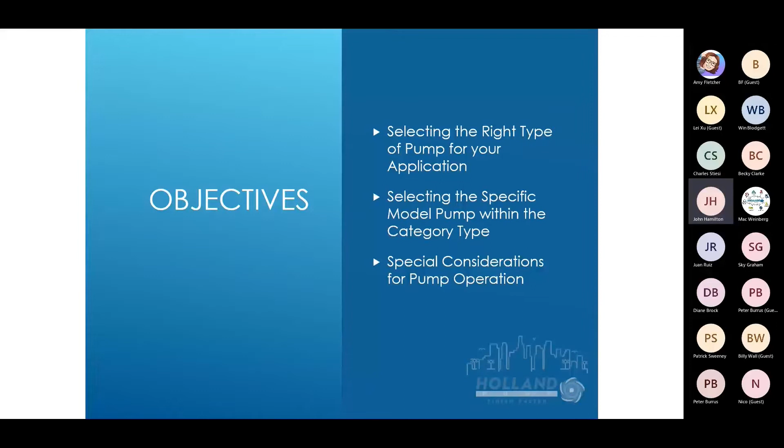Centrifugal pumps produce head and flow by increasing the velocity of the liquid with the help of a rotating vane impeller. Positive displacement pumps operate by alternating or filling a cavity and then displacing a given volume of liquid.

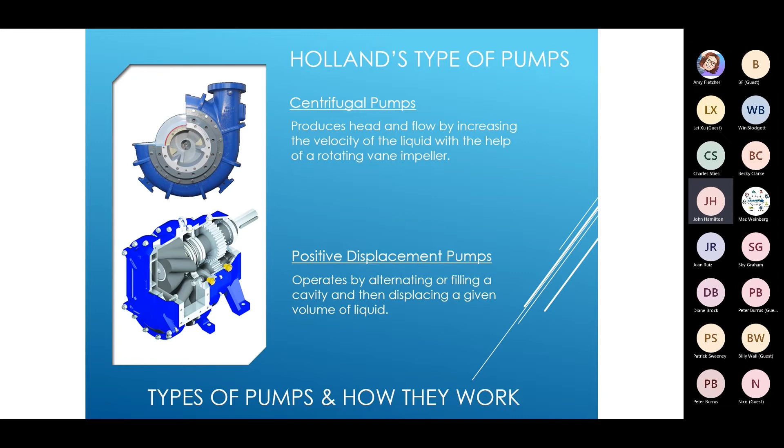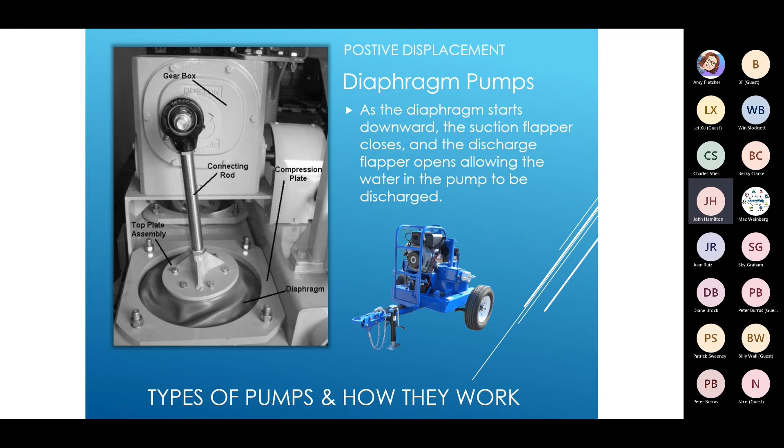Diaphragm pumps are an example of what are known as positive displacement pumps. The way they work, as the diaphragm starts downward, the suction flapper closes and the discharge flapper opens, allowing the water in the pump to be discharged.

Diaphragm pumps' advantages are they're dry priming, they can run dry, handle air and water, handle most solids, handle abrasives, and have no rotating parts in contact with the fluid.

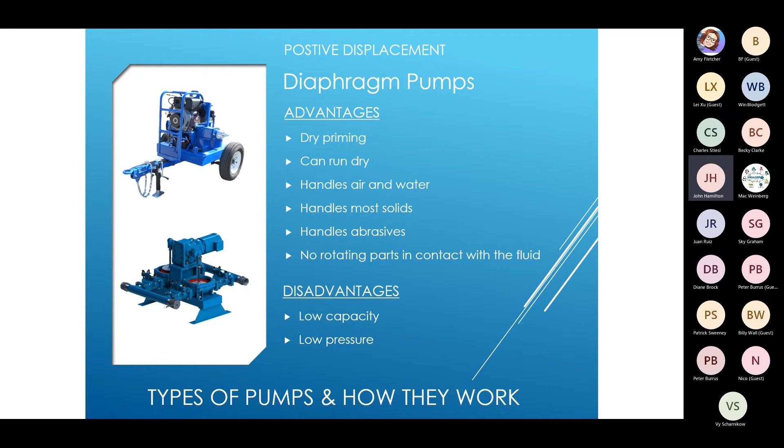The disadvantages are low capacity, low pressure. At Holland, we have two sizes available in 4 and 6-inch skid and/or trailers.

Pictured here is a well point pump on the top left, and then a cutaway of the pump itself. The general arrangement of the pump is a diesel engine, or it can be an electric motor with a gear reducer, and then the pump.

The fuel tank is sized to run the pump 60 hours continuously without the need for refueling. Below the control panel, you see a little canister with a white lid. That's for an extra fuel filter, which comes in handy.

The pump has shutdown protection. Many of the pumps are fitted with our HANS system, or Holland Automatic Notification System. It's a pump that cannot run dry for very long, so we have a shutdown system.

In rotary pumps, a low pressure area is created when rotors separate. The liquid is forced by atmospheric pressure and is carried around the housing as the lobes rotate. One lobe does not mesh with and drive the other; this is accomplished by using an external gear set.

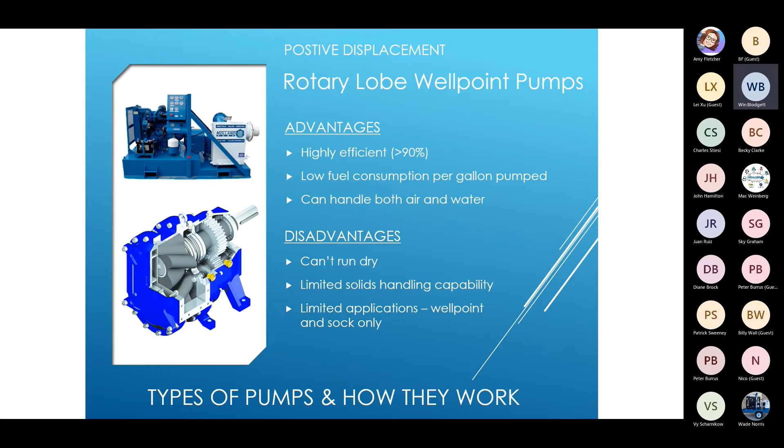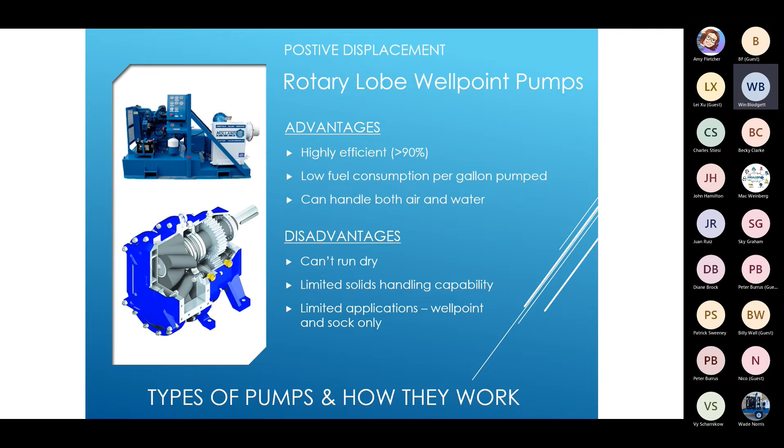However, manufacturers of these pumps typically use them in many applications, pumping thick material like drilling mud or glues and so on. But for us, the primary application is well pointing and sock.

Here you can see various types of centrifugal pumps. In the Holland pump fleet, we have electric submersibles, hydraulic driven pumps, and prime assisted pumps.

We also offer wet prime pumps. A wet prime pump requires the user to manually prime the pump with water before starting the pump.

Prime assisted pumps have several different methods. We use a diaphragm style. We also have Masport, and there is a compressor prime also. The ability to prime a pump is measured in CFMs, or cubic feet per minute.

Our trademark prime assisted suction lift pump is Prime 3. That's because our prime is 3 times faster than many of the pumps on the market because we use a 50 CFM diaphragm priming system.

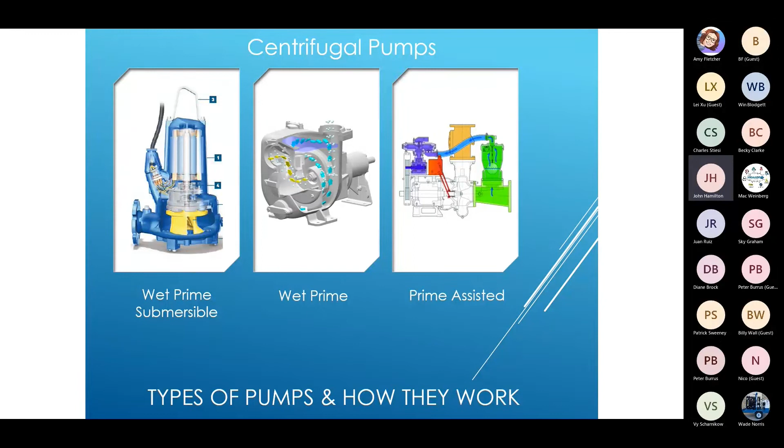Holland Pump also offers a Masport style vacuum assisted pump that has much higher CFM capability. In addition, Holland Pump represents many leading electrical submersible manufacturers, including Gorman-Rupp, ABS, Homa, Tsurumi, and Weta pumps.

Submersible pumps are a device that has a hermetically sealed motor close coupled to the pump body. The whole assembly is submerged in the fluid to be pumped and pushes the water.

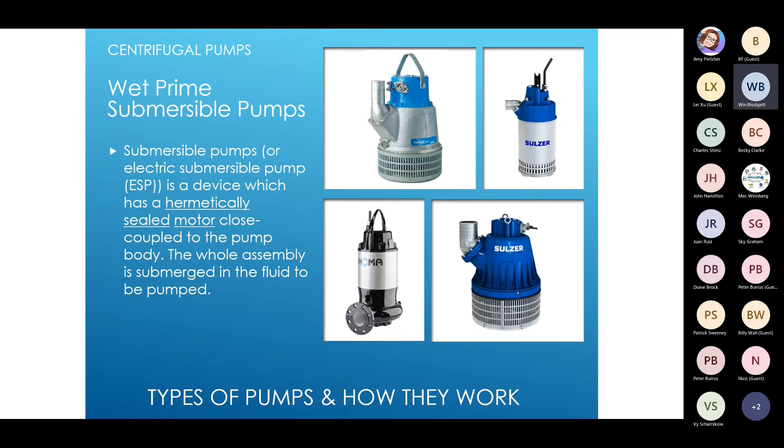Wet prime submersible pumps have the advantage of working continuously without failure when plugged into a stable power supply. Electric power is cheaper than fuel, and they have low maintenance cost. They're environmentally friendly, less likely to suffer discharge cavitation, and not affected by high altitudes or atmospheric pressure. The disadvantage is you must have a power supply.

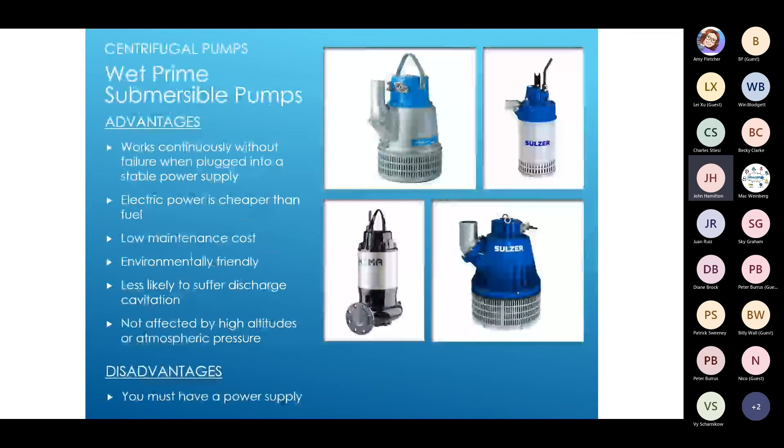Many of our locations also have generators we offer to rent alongside these pumps. Holland Pump has electric submersibles in many horsepower ranges to handle small solids, large solids, high volume or low head water transfer applications, and high head applications as well.

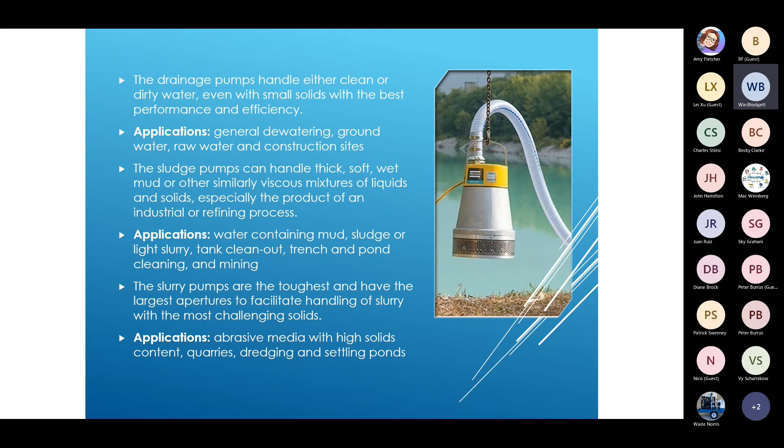In addition, we have staff members that specialize in providing permanently installed electrical submersible pumps, which typically might require an advanced control panel. One of the originators and leaders in the wet prime market is Gorman-Rupp, which is particularly famous for the Super T and CE series wet prime pumps.

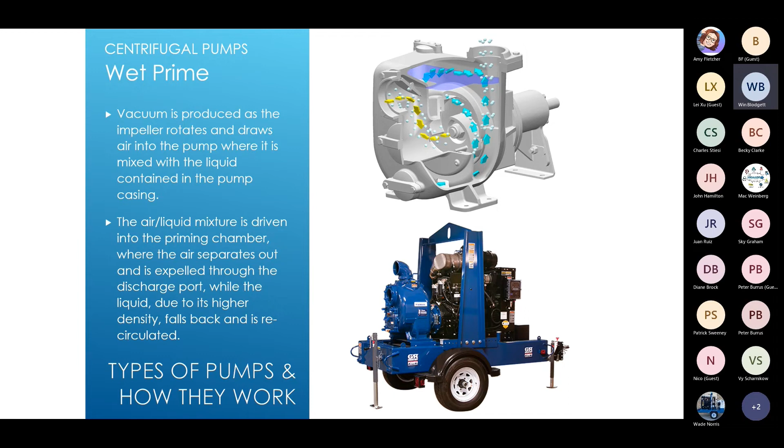The principle of these pumps is vacuum is produced as the impeller rotates and draws air into the pump where it is mixed with the liquid and contained in the pump casing. The air-liquid mixture is driven into the priming chamber where the air separates out and is expelled through the discharge port, while the liquid, due to its higher density, falls back and is recirculated.

The principle of priming mechanisms consists of a diaphragm pump that creates a vacuum and evacuates air. As water enters the priming chamber, a float rises and presses against a rubber pillar valve and closes off the priming system when priming is achieved.

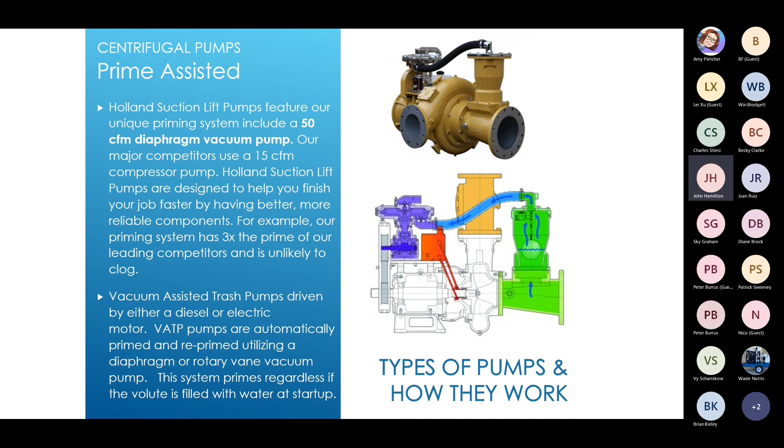Holland Pump rents prime-assisted pumps from 3 inches to 18 inches. Typically, these are diesel-driven skids or trailer pump packages that we designed to accommodate pumps manufactured by Selwood Pumps of the UK and Cornell Pumps of Portland, Oregon.

Also in 2020, we acquired CDPW Incorporated of Edgewater, Florida. For 99 years, CDPW has manufactured the complete dewatering line of vacuum-assisted trash pumps and wellpoint pumps in 4-inch, 6-inch, and 8-inch sizes. In addition, Holland Pump is a distributor for Gorman-Rupp, Atlas Copco, Thompson Pump, and Wacker-Neuson.

Typical features and benefits of suction lift and vacuum assist trash pumps include faster priming, common diaphragm or rotary vane vacuum assist made to prime from a dry condition. So often these pumps are called dry prime, you might hear that term. And they reprime automatically. They're good for open sumping, Kelly wells, sewer bypass, and applications where the pump may lose its prime and is unattended.

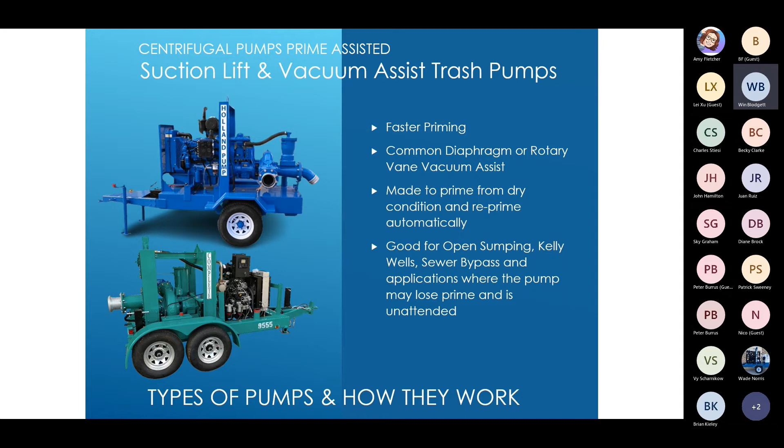Often our packages have auto start stop panels. With the Cornells, they feature a run dry cycloseal, and many of these pumps are available as what we call super silent or sound enclosed, both as sound enclosed engines and as fully enclosed.

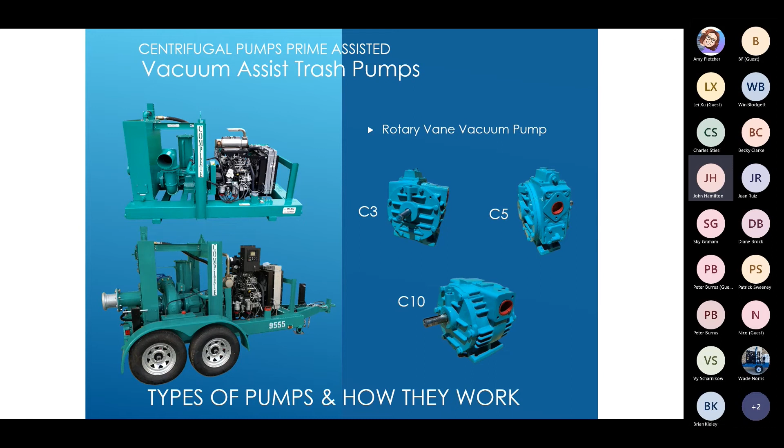The CDPW has 3 models of rotary vane priming systems. The smallest one is a C3. It does 65 CFMs and achieves 825 gallons per minute. The C5 is a 130 CFM vane pump and it achieves 1,400 gallons per minute. And the C10 is a 200 CFM pump that achieves 2,600 gallons per minute.

Holland Pump is probably best known for our hydraulic submersible system line. We build systems from 4 inches to 42 inches with a diesel-powered hydraulic unit, and the hydraulic pump is mounted directly to the engine and pumps hydraulic fluid from a hydraulic pump at about 2,000 psi, through a high-pressure hydraulic hose up to 100 yards to a hydraulic pump, which is typically floated on the surface of the water.

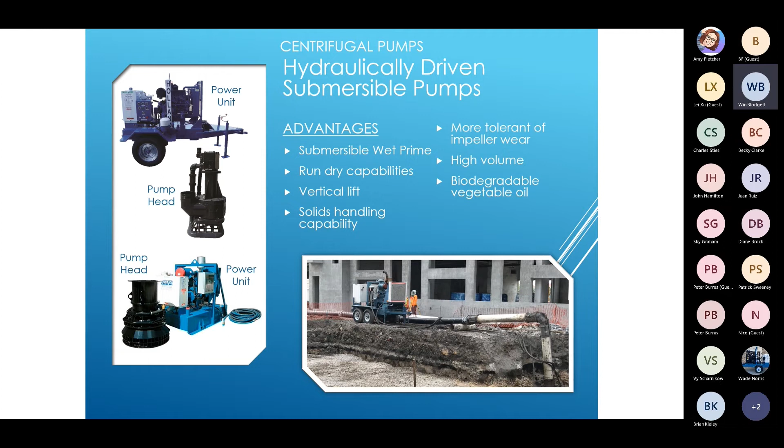The hydraulic fluid flows through the hydraulic motor and turns the shaft, and the hydraulic fluid then travels back at low pressure to the hydraulic tank where it is recirculated. A heat exchanger on the power unit helps to dissipate any heat that builds up from the continual recirculation of the fluid. Like an electric submersible, hydraulic pumps push the water.

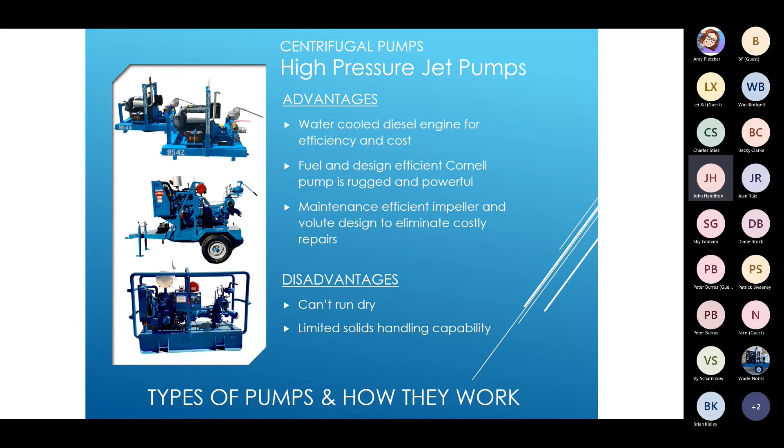Holland Pump makes 4 basic models of jet pumps. Typically, priming is achieved by use of a Protec priming system driven by hand. The advantages are a water-cooled diesel engine for efficiency and cost. Fuel and design efficient, Cornell pump is rugged and powerful. Maintenance efficient impeller and volute designed to eliminate costly repairs. The disadvantages are they can't run dry and limited solid handling capability.

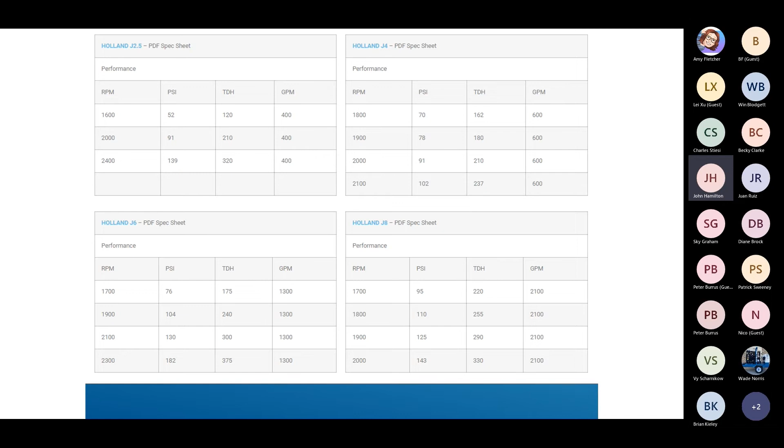Our jet pumps can achieve 100 to 180 psi. The J 2.5 can achieve 400 gallons per minute and 320 feet head. The J4 achieves 600 gallons per minute and 237 feet head. And our J6 can achieve up to 1,300 gallons a minute and 375 feet head.

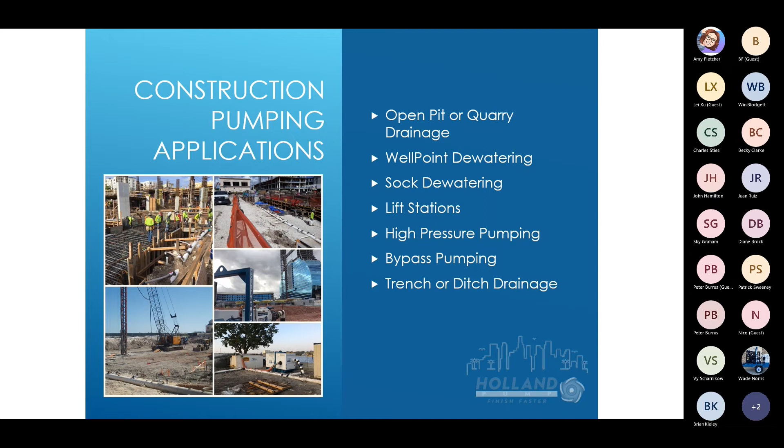Some of the most typical pump applications include open pit and quarry drainage, well point dewatering, sock dewatering, lift stations, high pressure pumping, bypass pumping, and trench and ditch drainage.

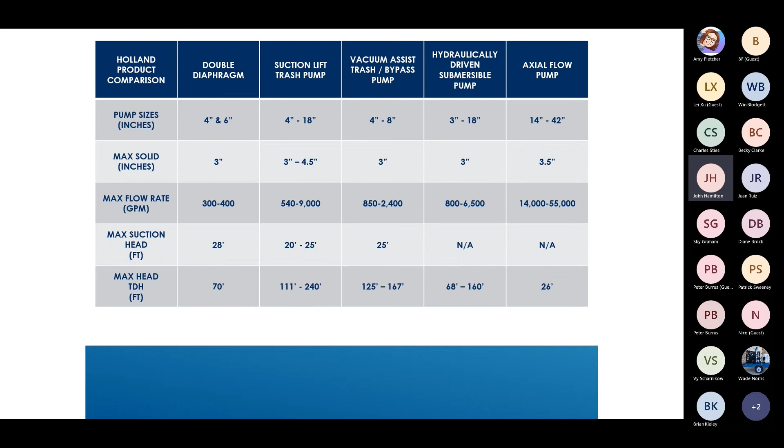Our axial flow pumps range from 14 to 42 inch. They'll handle up to 3.5 inch solids. The flow rate on them is 14 to 55,000 gallons a minute. Once again, they're down in the wet well, so they don't have a suction head, but the max head is 26 feet. Now, depending on your pumping requirements, how many gallons per minute you need to pump, how much head you have, what size solids, and so on.

Double diaphragm pumps can be appropriate, as can suction lift pumps, vacuum assist trash pumps, hydraulically driven submersible pumps, and axial flow pumps for open pit or quarry drainage.

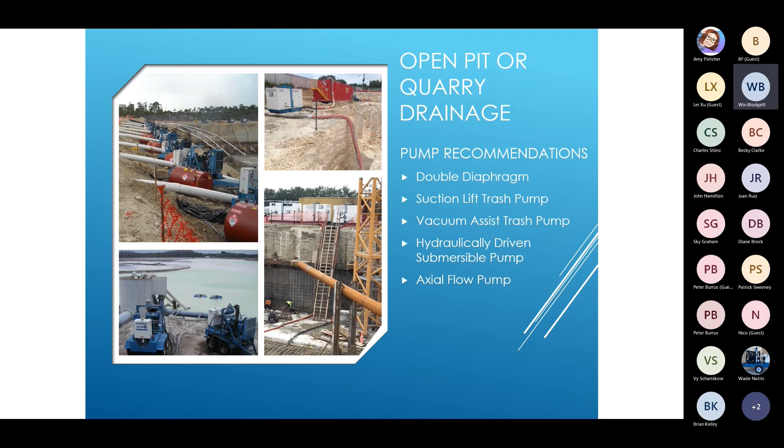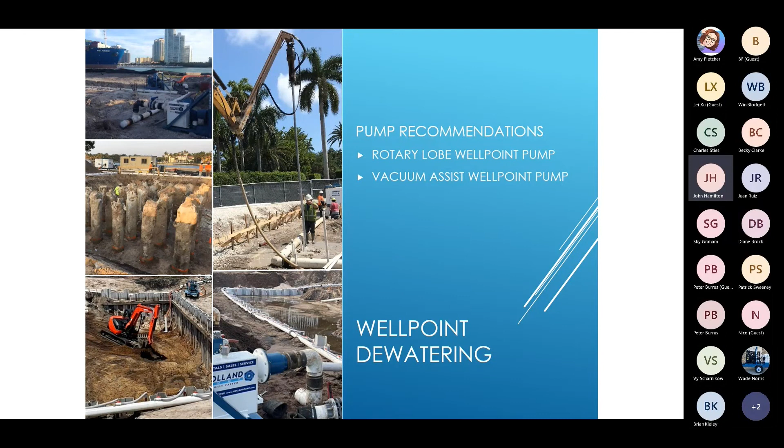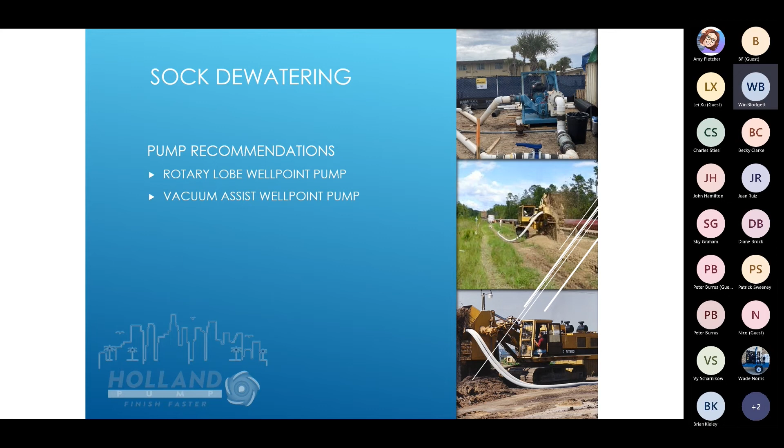Another popular method of using vacuum assisted well point pumps and positive displacement pumps is in conjunction with sock dewatering. The first step is to use a trencher to dig a trench and bury drain tile, which is sleeved with filter cloth. The pump is then connected to one end of the drain tile, and dewatering is achieved by lowering the water table and expanding the cone of influence. An advantage of sock dewatering is that the system can remain in place and used again if needed.

For many years, municipalities relied primarily on diesel-driven generators to provide temporary power for lift stations when there is a power outage. The generator would provide temporary power to permanently installed pumps. About 15 years ago, pump companies started to offer what is commonly called backup lift stations, which typically consist of a sound enclosed diesel pump. The backup lift station provides double redundancy. When there is a power outage, the sound enclosed pump provides temporary pumping.

However, most of the time lift stations fail, it isn't because of a power outage. Most of the time lift stations fail because the permanent pump system has failed. So the backup lift station provides double redundancy by providing temporary power and temporary pumping when there's a power outage, and temporary pumping when the permanent pump system fails.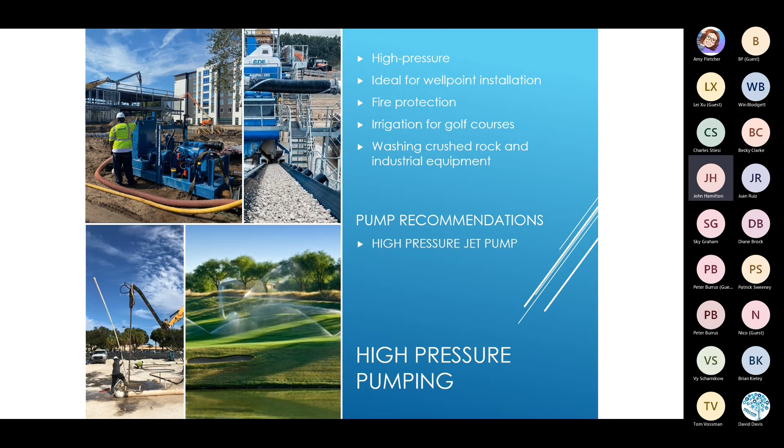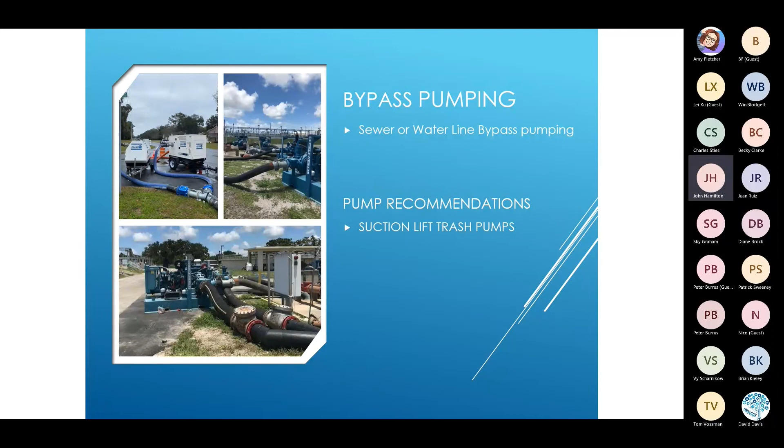One of the best applications for prime assisted suction lift pumps is for bypass pumping, which can consist of bypassing a manhole when pipe is being repaired, or bypassing a lift station when a lift station is being renovated. In fact, anytime permanent pumps break or need to be serviced, the pumping needs continue, so prime assisted suction lift pumps are often a great choice for this work.

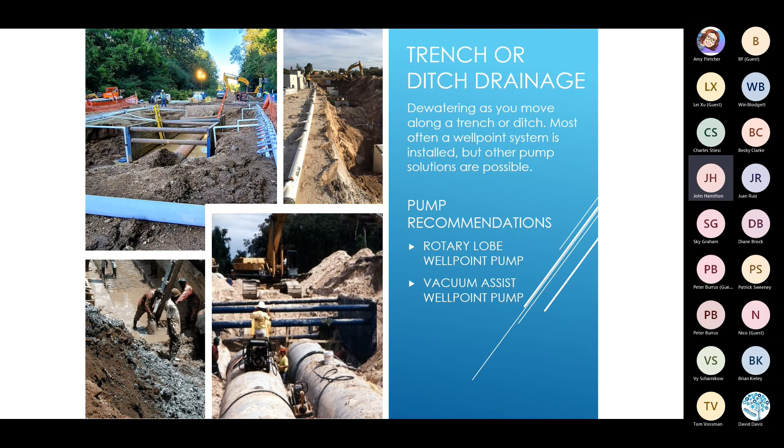Often submersible pumps and well point pumps are used in conjunction with one another. A well point system is installed adjacent to the pump cut to lower the water table, and an electric or hydraulic driven submersible is used to assist, capable of handling dirty water and trash.

Let's run through a real scenario. So what kind of liquid material will you be pumping? Dirty, muddy water on an excavation site. We'll go with that one.

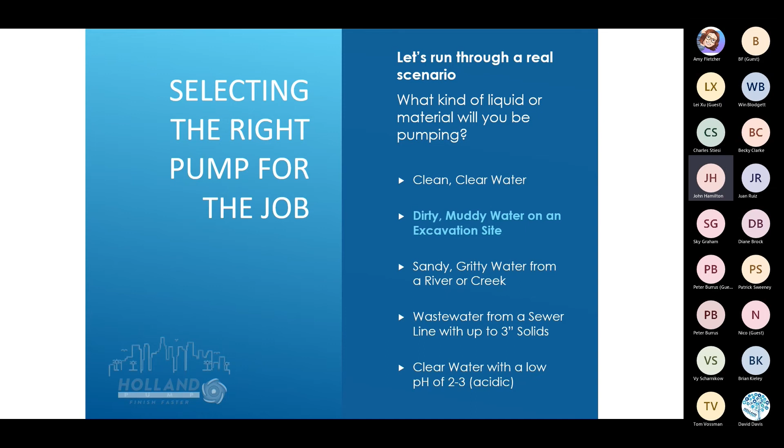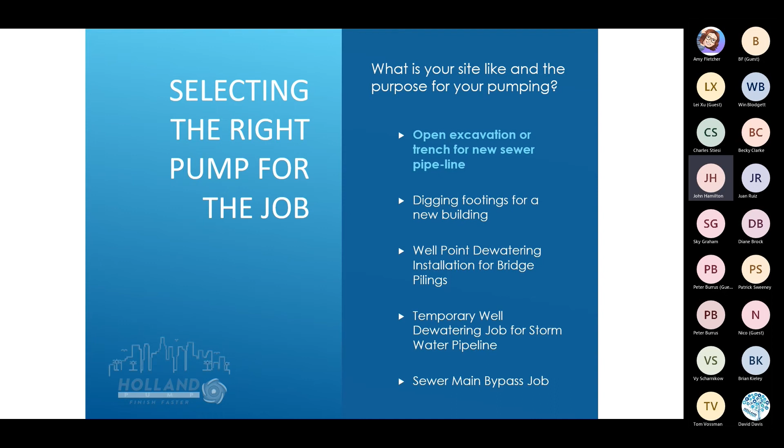What is your site like and the purpose of your pumping? Open excavation or trench for new sewer pipeline. What volume are you permitted to discharge per hour? 102,000 gallons per hour. How far away is your discharge point?

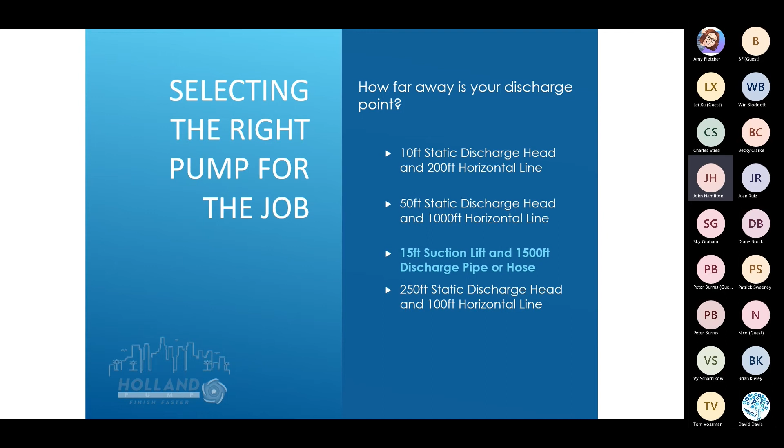15-foot suction lift and 1,500 feet discharge pipe or hose. Can you get to the discharge point in a straight line, or are there obstacles to maneuver around? 8-inch suction hose with one 45-degree elbow, then 8-inch PVC pipe horizontal line with one 90-degree elbow and two 45s.

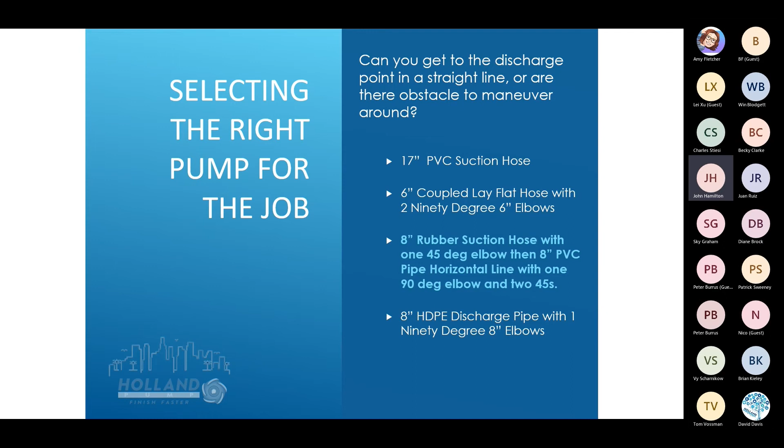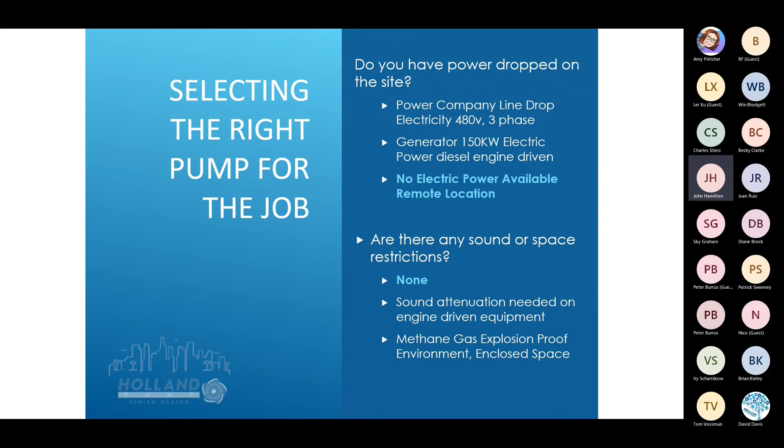Do you have power dropped on the site? No electric power available, remote location. Are there any sound or space restrictions? None. Here's the summary: dirty, muddy water on an excavation site.

Open excavation trench for new sewer pipeline. 102,000 gallons per hour, 1,700 gallons per minute. 15 feet of suction lift and 1,500 feet of horizontal line. 30 feet of 8-inch rubber suction hose, then 8-inch PVC horizontal line by 1,500 feet with elbows.

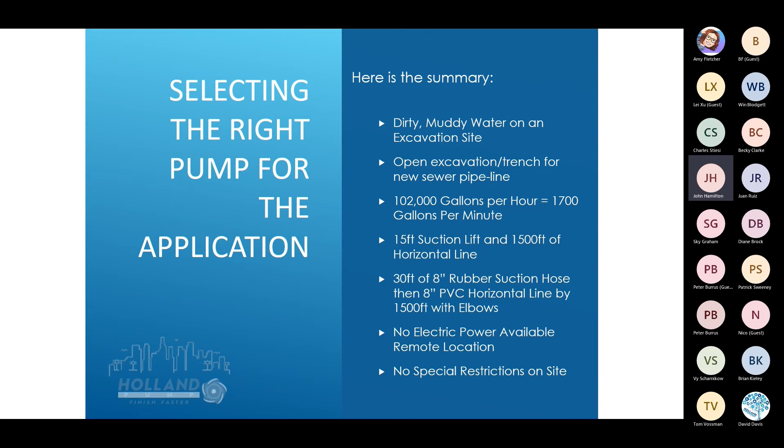No electric power available, remote location, no special restrictions on site. So now that we know all the parameters around the application and what's going to be required to do the pumping, we move towards calculating the total dynamic head of the system.

Just to explain a little bit about that, both on the suction side of the pump and on the discharge side of the pump, we have losses due to friction of the water moving through the pipe on the suction side and water moving through the discharge on the discharge side. One of the things that we need to be aware of is the velocity of the water, both on the suction side and on the discharge side.

On the suction side, the best practice in terms of minimizing the wear to your pump is to keep the velocity under 6.5 feet per second, and on the discharge side, about 15 feet per second.

Oftentimes, because of the length of discharge that is required, we'll play around with what kind of discharge we're going to use, what size we're going to use, and what material we're going to use. All pipe and hose has pressure ratings. So from a safety standpoint, it's very important, very critical to select the right material so that no accident is created by using the wrong material.

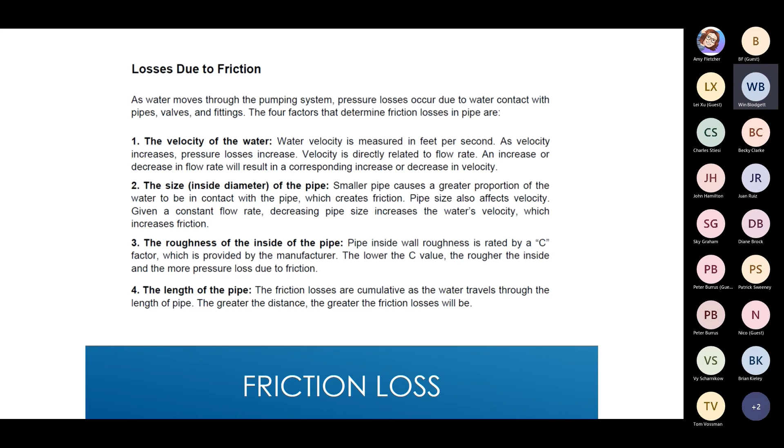There's a lot of smartphone applications available that make this easy for you. You can do it by hand, like that's old school, where you consult some books that have tables both for losses of feet per 100 for each pipe size, and in addition, there's tables that show friction loss in pipe fittings. What's shown here is just an example, because we actually typically use much larger fittings in terms of diameter.

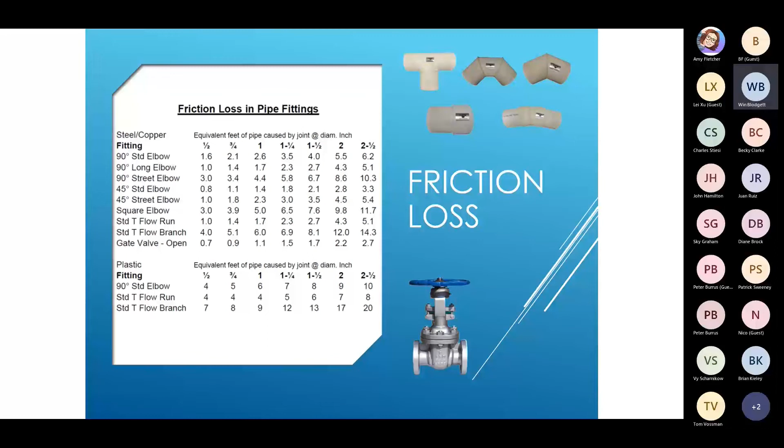This gives you an illustration of what's widely available that we consult as we calculate the total dynamic head. You can see in this chart, if you look under 400 gallons per minute, what the result is if you're using 4-inch hose versus 6-inch hose. It makes a big difference in the velocity in feet per second.

And in the overall head. So sometimes, depending on what you're pumping, you really need to have as small a discharge as possible to keep the velocity up. For example, if you're pumping really thick, dirty water that has a lot of solids in it, you don't want the solids to settle in the pipe, so you have to keep moving the solids through the pipe.

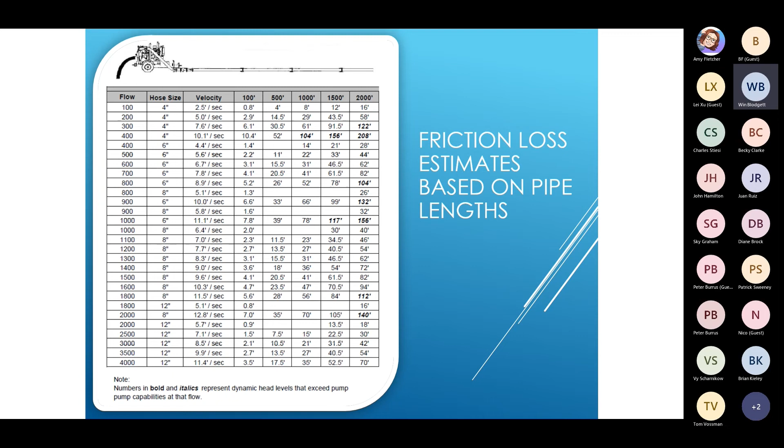And in that case, you might decide that it's better to put a lot of head on the system and move the material through the head than risk having the solids settle in the system and cause you problems. This is a typical illustration just to show everyone what we have to take into account.

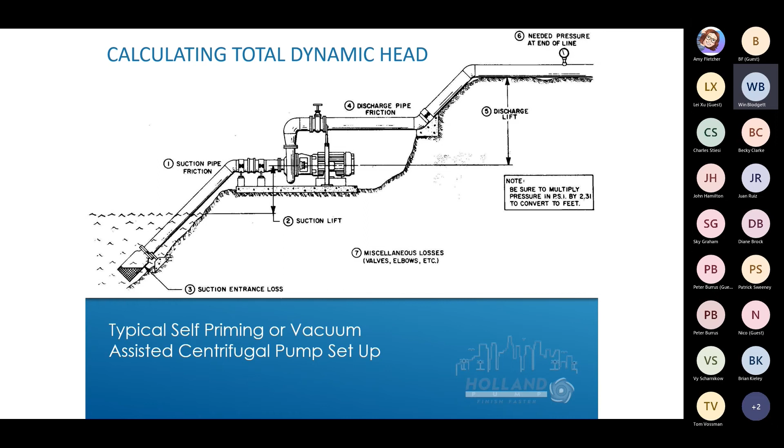The first thing is suction lift, which is right there. That's the vertical distance from the pump center line to the free surface of the liquid. Now, you do have to take into account that if your desire is to lower that water level down, maybe you're lowering it another 5 feet, and then your suction lift is going to increase by 5 feet.

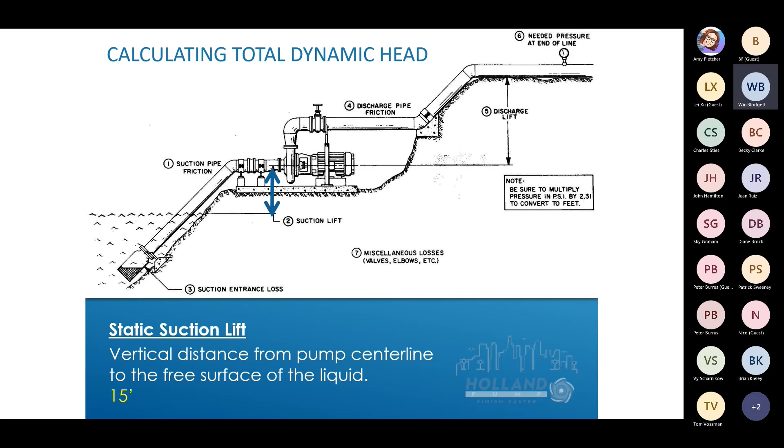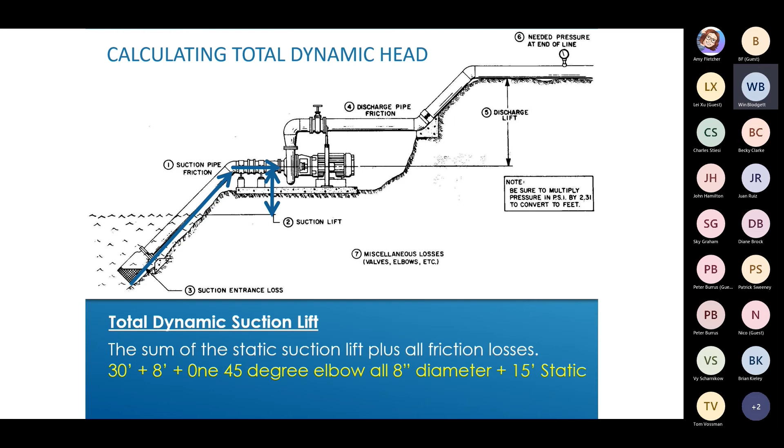Then you also need to take into account the fittings that are being used, the 45-degree elbow, the suction screen, because those have known losses which are added to calculate the total dynamic suction lift. Then you also have to take into account the discharge lift, which is the vertical distance from the pump center line to the highest elevation of the discharge line, which in this case is 20 feet.

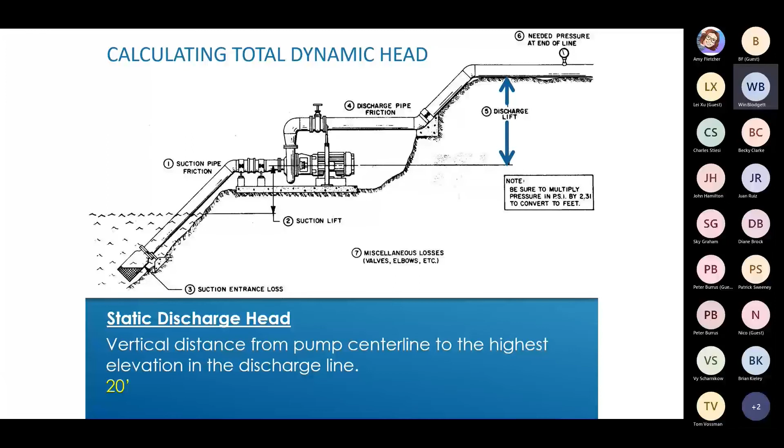So the total dynamic discharge head is the sum of the static discharge head plus all the friction losses. So 8 feet plus a 90-degree elbow plus 20 feet plus a 45-degree elbow plus 15 feet plus a 45-degree elbow plus 1,500 feet of horizontal pipe, all in 8-inch diameter.

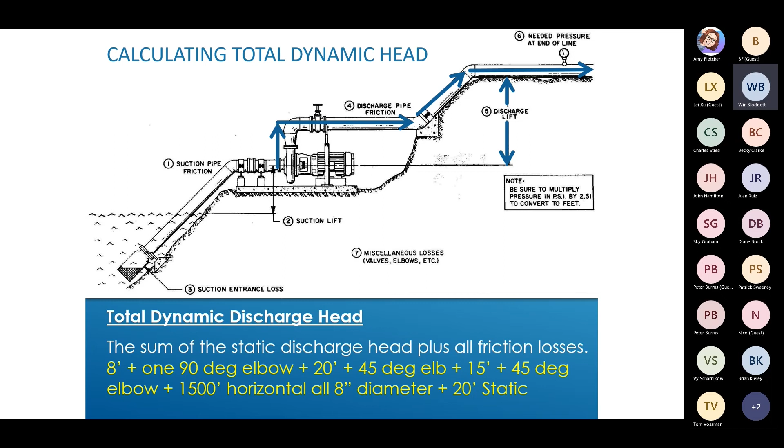I'll just speak about one other thing. It's not on the slide here, but a great practice with suction lift pumps - Senior Vice President of Sales, Jared Williamson, and I were discussing - it's great to use gauges. So if you have a gauge on the suction side of the pump and a gauge on the discharge side of the pump, you can just use the gauges to calculate the total dynamic head.

If the suction gauge shows a positive inlet pressure, then subtract it from the discharge pressure to get total dynamic head. Otherwise, you add the suction vacuum to the discharge pressure to get the total dynamic head.

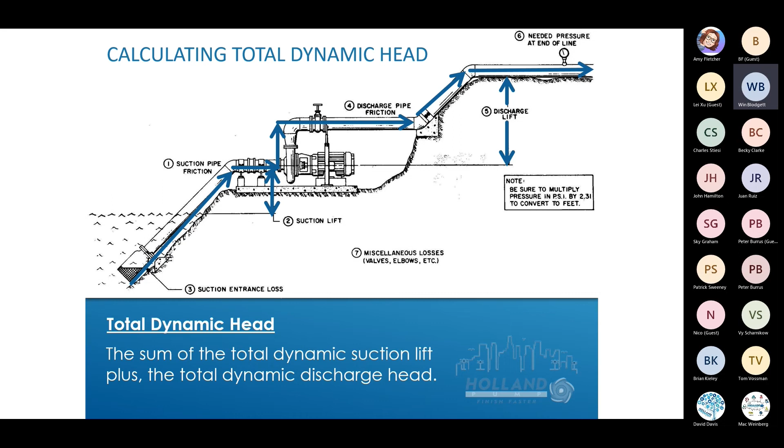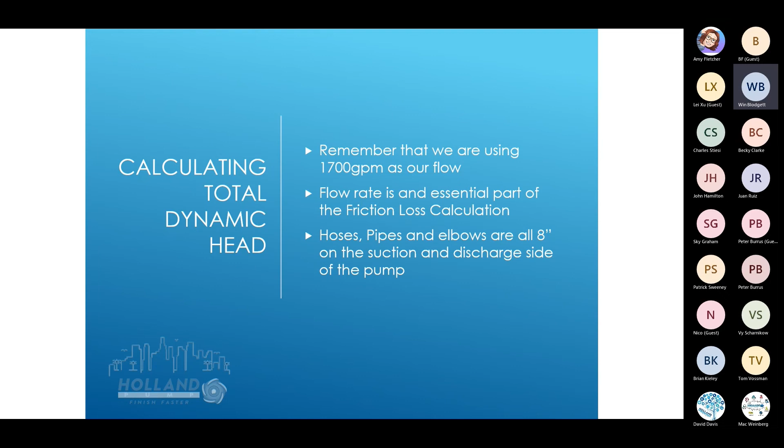So to just review, we remember that we were using 1,700 gallons as our customer's desired flow. The flow rate is an essential part of the friction loss calculation. And hoses, pipes, and elbows have all been calculated at 8-inch for the suction side of the pump and the discharge side of the pump.

This is often done because depending on where your pump comes from, for example, if it's a European pump, all of the technical data on the pump will be expressed in metric.

So now that we know how many gallons need to be pumped, and what we are pumping - what kind of fluid, what size solids, what temperature, what elevation - and we also know how much suction head we have, how much discharge head we have, and what the total dynamic head is, we can consult the pump curves and select the best pump for the application.

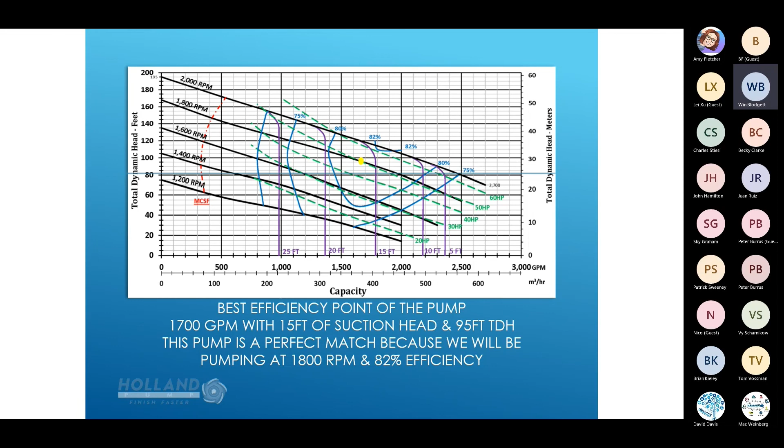By picking a pump that will achieve the desired duty point, and also the best efficiency point of the pump, we put minimal wear on the pump and at the same time have the best fuel efficiency.

We have many of our spec sheets listed on our website and available to download. Typically, the spec sheets follow a standard format. At the upper right, we list the specification section and the release date of the spec sheet. In the first section, we list the details about the pump and the pump materials. This is often followed by a performance table, and that shows the BEP of the pump.

There are about 6 or 7 lines there, and the one that has the asterisk is the best efficiency point. Below the performance table on the first page, we generally describe the specification of the pump driver, be it an engine or an electric motor. Typically on the second page, we have a schematic diagram that shows the pump layout and the overall dimensions of the package. Often we also include the overall weight of the unit as well.

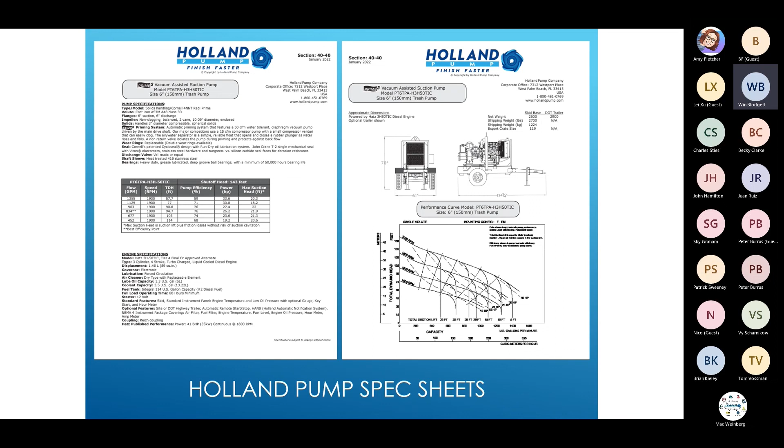Finally, we include a pump curve. For prime assisted suction lift pumps, this will show the performance at different speeds and suction lifts.

In Florida, most of our work is close to sea level, so one thing we really didn't talk about today was making adjustments for altitude. But Earth's atmospheric pressure is 14.7 psi, and every 1 psi translates to 2.31 feet. So a perfect vacuum at sea level would be 33.95 feet.

Pump curves will often state a net positive suction head required, or NPSHR. And the inverse of NPSHR is NPSHA, or net positive suction head available. In general, with prime assisted suction lift pumps, when we pump to the extreme right of the curve, the NPSHR increases. This means that in order not to damage the pump, the static lift must decrease.

So you'll see oftentimes a pump working, pulling 20 feet, but you'll hear a loud popping noise. When you discern that, what you're hearing is suction cavitation, and that will damage the pump impeller in short order. Depending on site conditions, putting the pump close to the surface may be possible, but it may be difficult to fuel, or it may have the danger of washing in, going underwater.

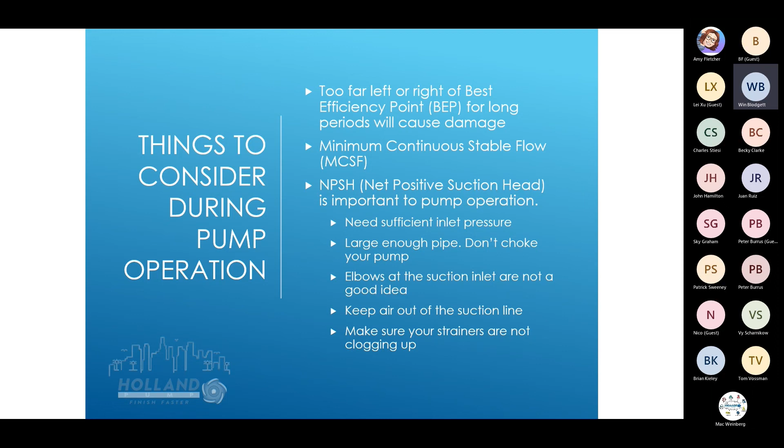If there's a pump failure and there aren't a lot of other pumps working besides it doing the same activity—if the application is relying on 1 or 2 pumps and one pump fails and the water is rising, it doesn't take too long for the pump to go underwater. Another thing to always be concerned about, especially in Florida, especially this time of year, is rain events.

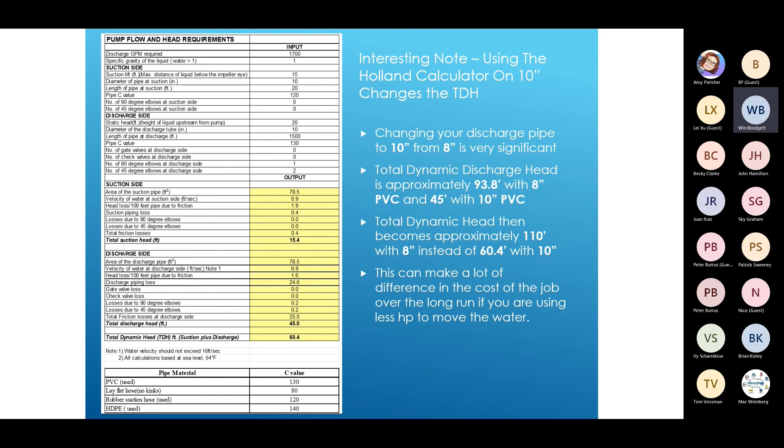This is just an example of a tool that we use internally, a spreadsheet tool, where a pump consultant can plug in all of the parameters for the suction side of the pump and the discharge side of the pump, and play around with using different diameters of pipe to get to a dynamic, total dynamic head that works well with the curve.

In summary, there are many types of pumps from which to choose. Choosing the right pump is really critical for the job. I always say that pumping is often a very small part of the overall budget for the job, but doing the pumping right can affect the job schedule in a dramatic way and save a tremendous amount of money for customers.

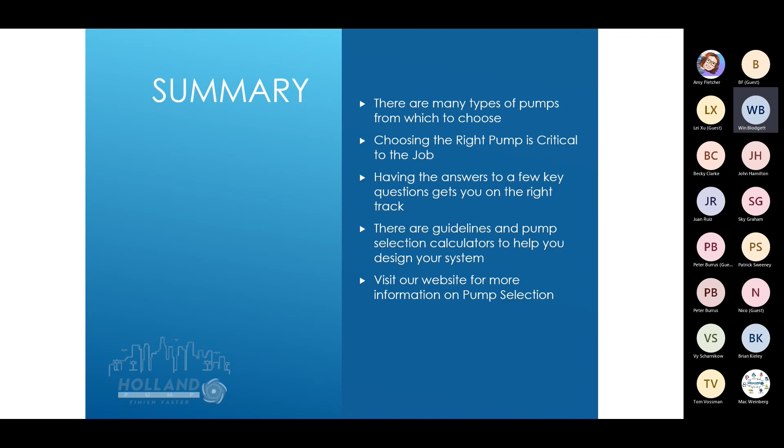Having the answers to a few key questions gets you on the right track. There are guidelines and pump selection calculators to help you design your system, and please visit our website for more information on pump selection. Any questions or comments?